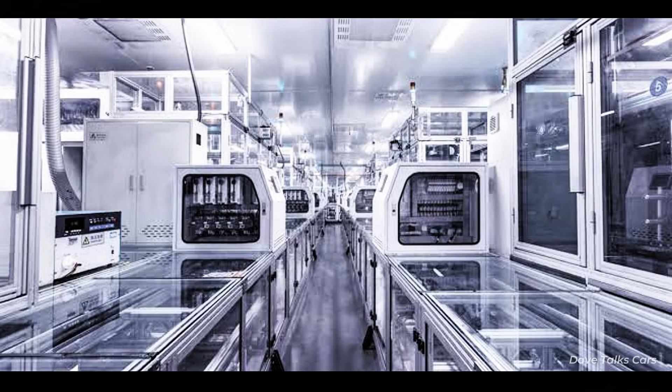There is a battery sitting in a laboratory in Shenzhen right now that may be the most important object on Earth, not because of what it is, but because of what it means for your car, your country's economy, and a technology race that has quietly become the defining industrial competition of our time.

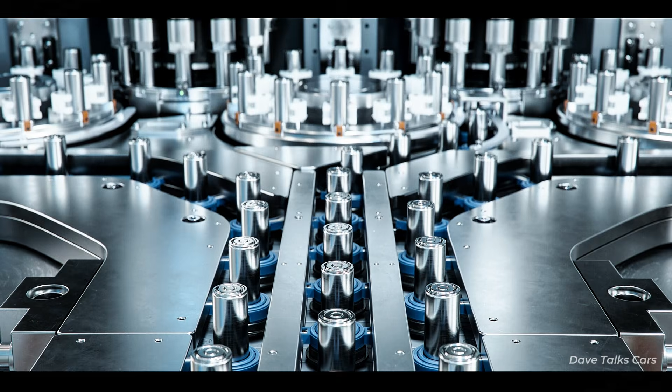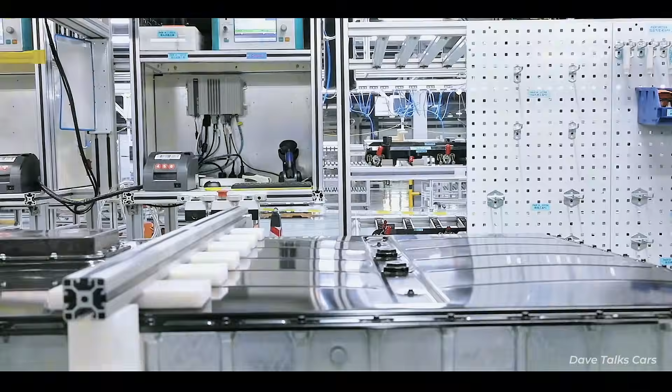You've probably heard that solid-state batteries are coming. You've probably heard that for years. And for years, they've remained just over the horizon, always promising, always delayed, always 5 years away from changing everything. But something shifted, and the shift didn't happen the way most people expected. It didn't happen in a Silicon Valley lab. It didn't come from a billion-dollar startup that promised to reinvent energy storage.

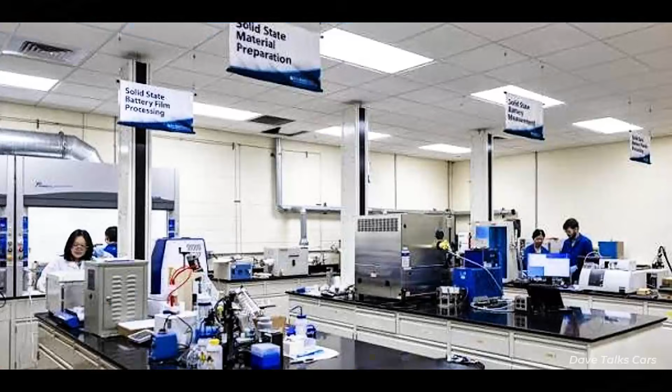It happened inside a government program most people in the West have barely heard of. It happened because China decided to stop treating this as a science problem and start treating it as an industrial war. And if that strategy is working, and there is growing evidence it might be, then the consequences for every automaker, every battery company, and every country that thought it could catch up later may be more severe than anyone is ready to admit. But before we get to what China built, we need to understand exactly why the world needed something new to begin with.

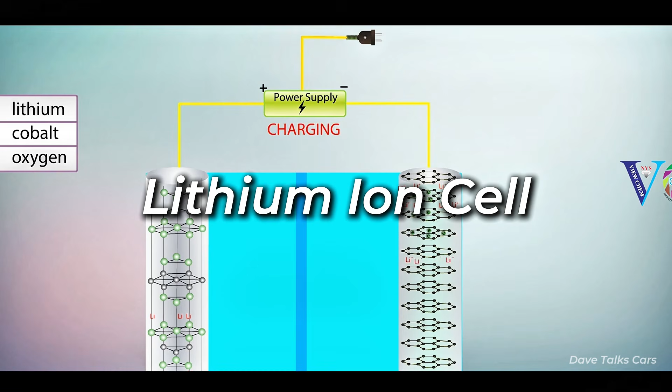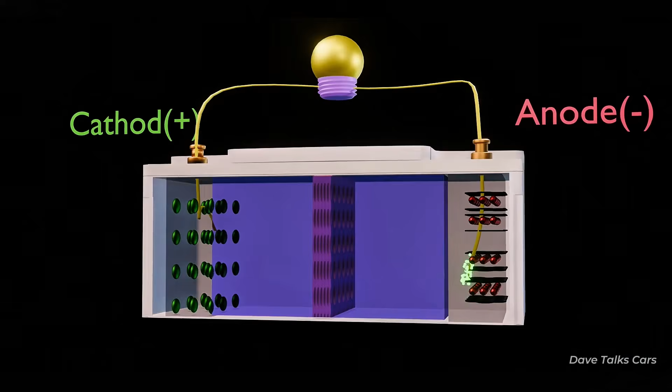For the last 3 decades, the story of electric vehicles has really been the story of one battery, the lithium-ion cell. It powered the first commercial EVs. It made Tesla possible. It made the $25,000 electric car conceivable. And it did all of that while getting cheaper and more capable every single year. At its peak, lithium-ion was one of the great manufacturing success stories of the modern era. But every technology eventually hits a wall, and lithium-ion began showing cracks a long time ago.

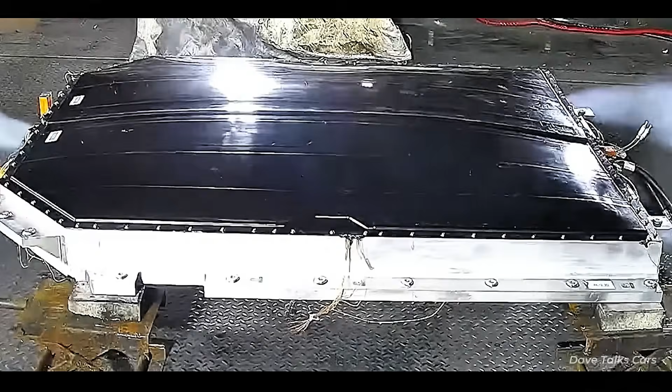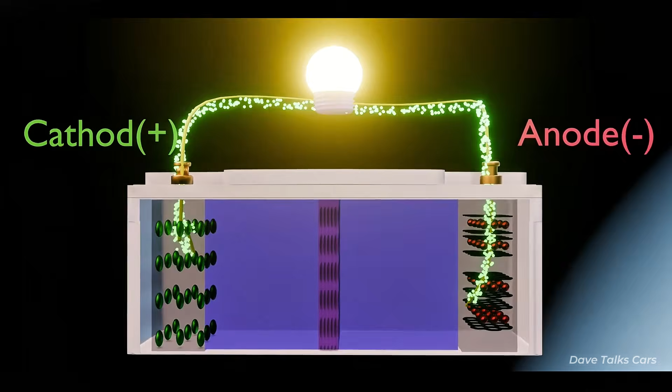The problem isn't that lithium-ion batteries are bad. They're remarkable. The problem is the gap between what they can do and what we actually need. They still require complex cooling systems to prevent overheating. They still lose meaningful capacity after a few thousand charge cycles. And no matter how many improvements engineers squeeze out of the chemistry, there's a fundamental limit to how much energy you can safely pack into a cell built around a liquid electrolyte.

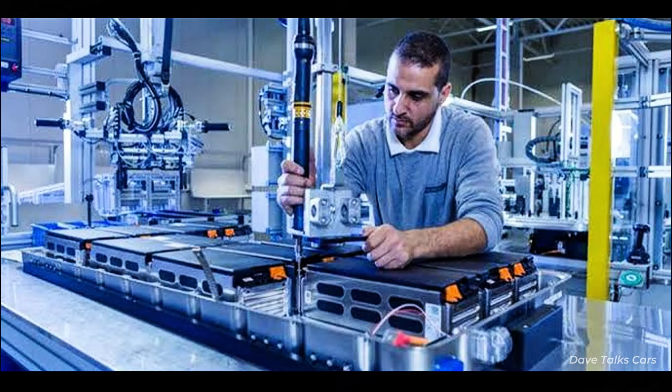That liquid, the medium through which charged particles travel between electrodes, is flammable. It degrades over time. It places an upper ceiling on how much power can be stored in a given amount of space. And for years, that ceiling has been getting harder and harder to raise. Engineers began to suspect that the era of meaningful lithium-ion improvements might be drawing to a close. The gains were getting smaller, the costs were getting higher, and the performance gap between what customers wanted and what the chemistry could deliver kept stubbornly refusing to close, which led the entire industry toward the same conclusion.

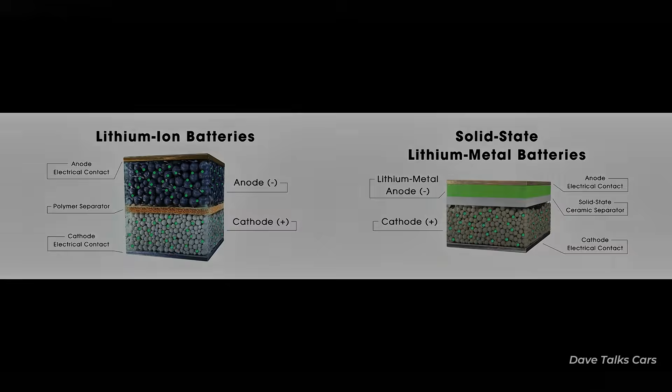The next battery couldn't just be a better version of what already existed. It had to be built on completely different foundations. That's where solid-state batteries entered the story. And if you don't know exactly what makes them different, the explanation is simpler than you might expect, and the implications are far larger than most people realize.

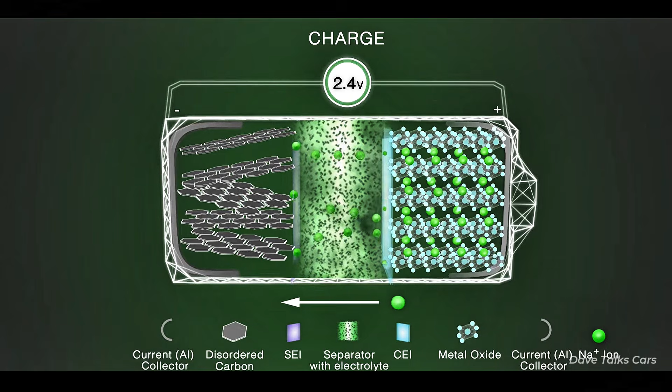Inside every battery, charged particles called lithium ions move back and forth between 2 electrodes. That movement generates electricity. The medium those particles travel through is called the electrolyte. In every lithium-ion battery on the market today, in your phone, your laptop, your electric vehicle, that electrolyte is a liquid. Think of it as a highway that ions travel across every time you accelerate. It works. It has worked for decades. But that highway is also flammable, unstable at extreme temperatures, and physically limiting in terms of how much energy can move through it safely.

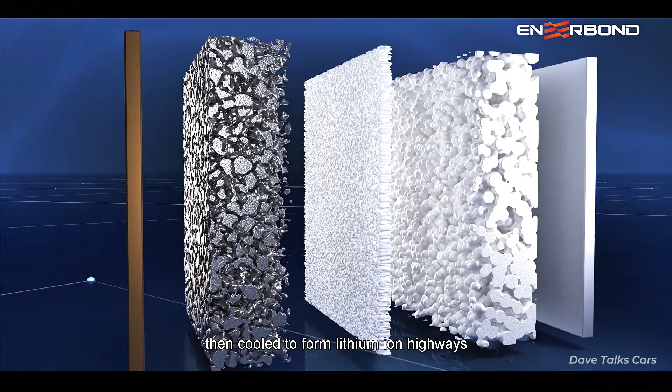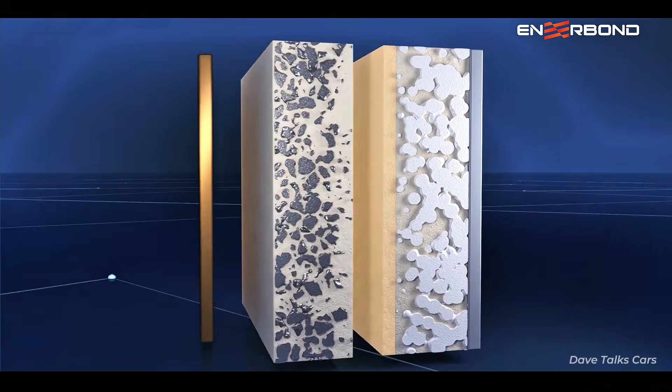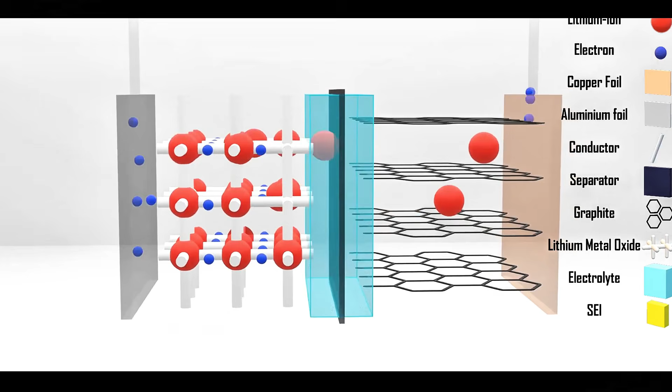A solid-state battery does something that sounds almost too simple. It replaces the liquid with a solid material. That single change rewrites almost every other constraint in the system. A solid electrolyte doesn't catch fire. It opens the door to new electrode materials, particularly lithium metal anodes, which battery scientists have dreamed about for decades because of how dramatically they can increase energy storage. It eliminates the need for heavy cooling systems.

And it removes one of the primary mechanisms through which batteries degrade over time. The result, in theory, is a battery that stores roughly twice as much energy in the same physical space, charges dramatically faster, lasts longer, and is far less likely to catch fire. If all of that sounds almost too good to be true, that's because there has always been a catch.

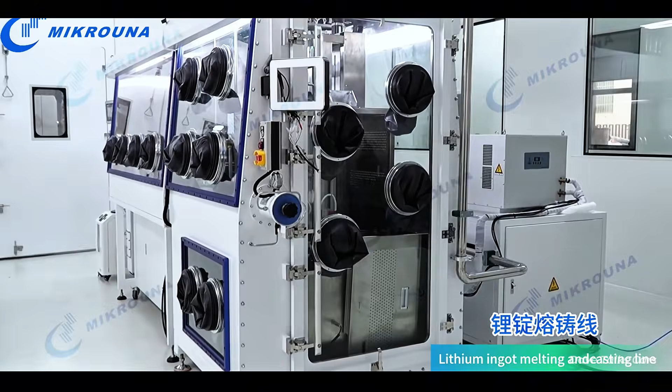The science of solid-state batteries has been understood for years. The challenge was never the concept, it was making them real. Replacing a liquid electrolyte with a solid one turned out to be deceptively difficult, not in the lab, where controlled conditions made early prototypes possible, but in the factory, where you need to produce millions of identical cells day after day at a cost that makes commercial sense.

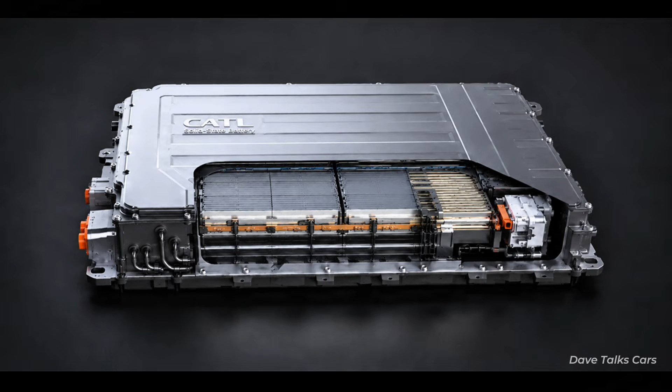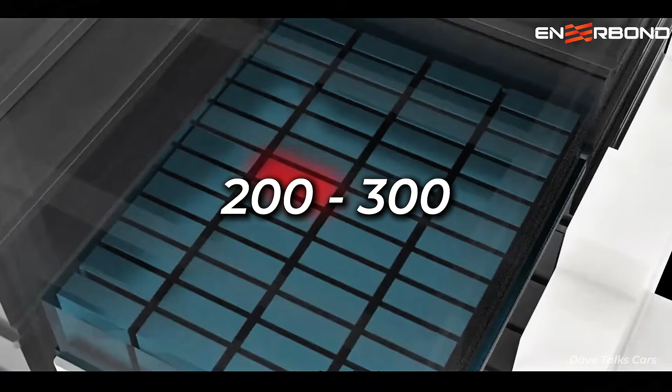And of all the different approaches researchers tried, the one that showed the most promise and the most manufacturing difficulty was a specific material class called sulfide electrolytes. Sulfide-based solid-state batteries offer the highest energy density ceiling of any approach being pursued today. Some research targets reach 450 to 900 watt-hours per kilogram. Current lithium-ion chemistry tops out around 200 to 300. That's not an incremental improvement, that's a generational leap.

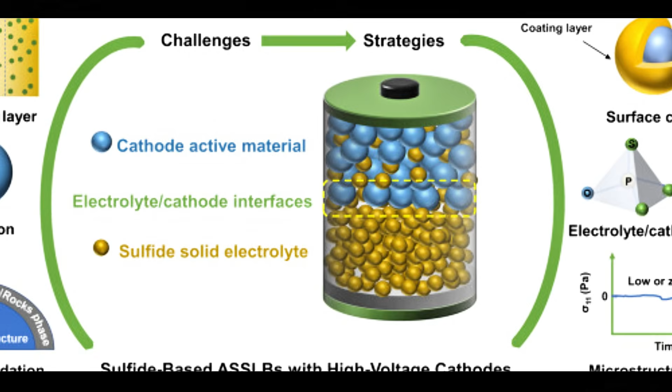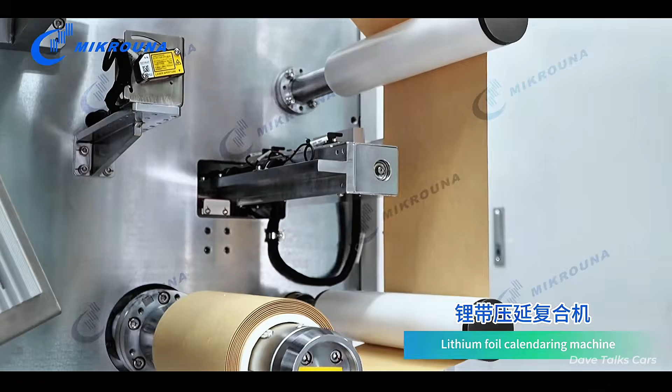But sulfide electrolytes came with a uniquely brutal problem. They were catastrophically sensitive to moisture. During manufacturing, even microscopic traces of humidity in the air could contaminate the electrolyte material, degrade its performance, or ruin an entire production batch. This wasn't a minor inconvenience.

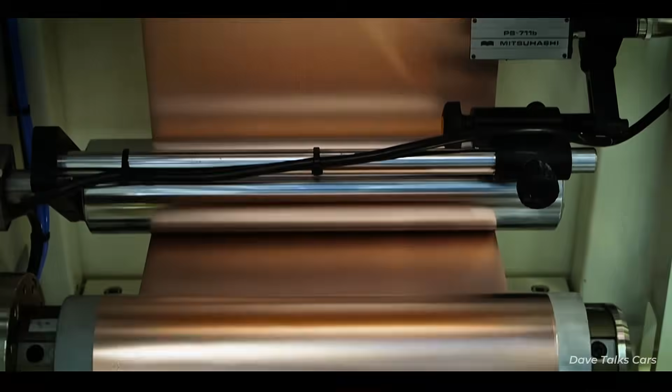It meant that anyone serious about manufacturing sulfide-based solid-state batteries at scale would have to reinvent how battery factories worked from the ground up. They would have to build ultra-dry production environments where humidity was reduced to almost nothing. They would have to design robotic assembly systems that minimized human contact with the materials. They would have to develop automated inspection systems capable of detecting defects invisible to the human eye.

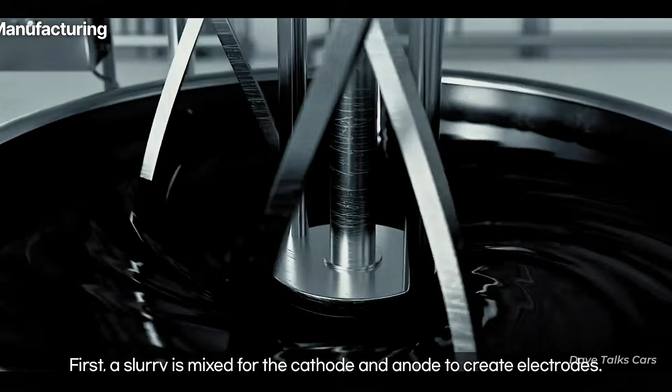Most companies that encountered that manufacturing challenge did what companies tend to do. They kept the research going in the lab and promised that the factory problems would be solved when the time was right. China made a different decision. And that decision may prove to be the most consequential strategic choice in the history of the automotive industry.

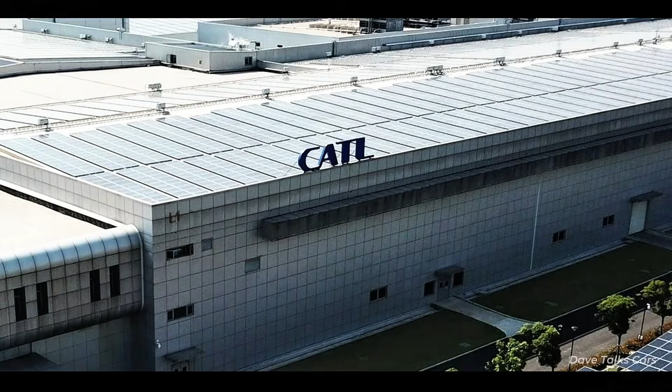In January 2024, Beijing did something that had no real precedent. It gathered the fiercest competitors in the Chinese battery industry into the same room and told them to work together. The resulting organization was called the China All-Solid-State Battery Collaborative Innovation Platform, CASIP for short. What made it extraordinary wasn't just who was in the room, it was what it represented.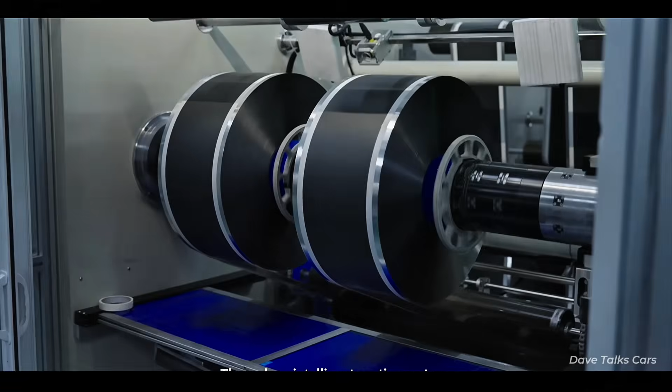CATL and BYD, two companies that had spent years competing for every single gigawatt hour of market share, suddenly found themselves in the same national program, sharing pre-competitive research, coordinating on manufacturing challenges, and operating under a unified timeline. Six of the top 10 automotive battery manufacturers in the world were part of the alliance. The Ministry of Industry and Information Technology was involved. The Ministry of Science and Technology was involved. State-owned investment funds were committing capital.

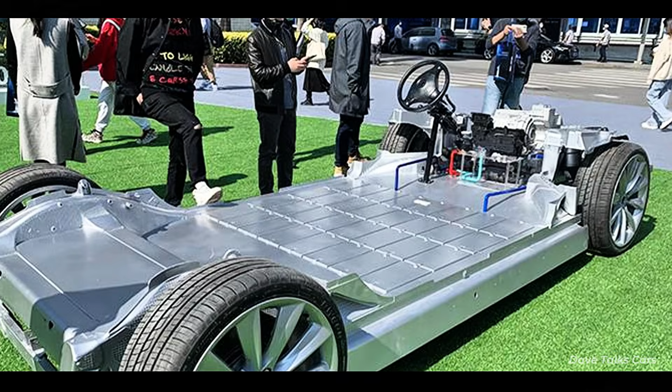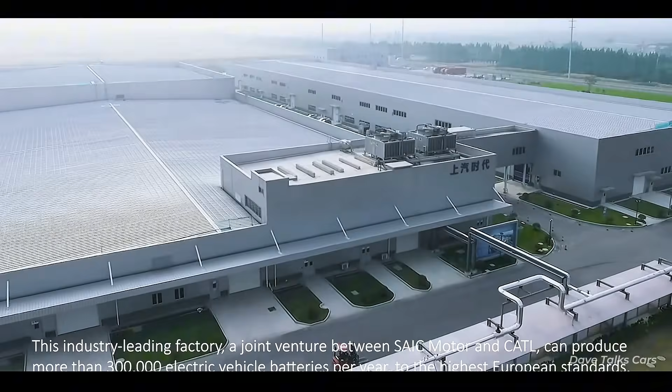And within months, the Chinese government followed with an additional investment of over 6 billion yuan, roughly $830 million, channeled directly into accelerating solid-state battery development among the country's leading manufacturers. One professor at Tsinghua University, speaking at the ceremony marking CASIP's formation, said something that captured the underlying anxiety driving the whole program. He warned that the industry needed to be prepared for the risk that solid-state batteries could overturn China's existing advantage in automotive batteries.

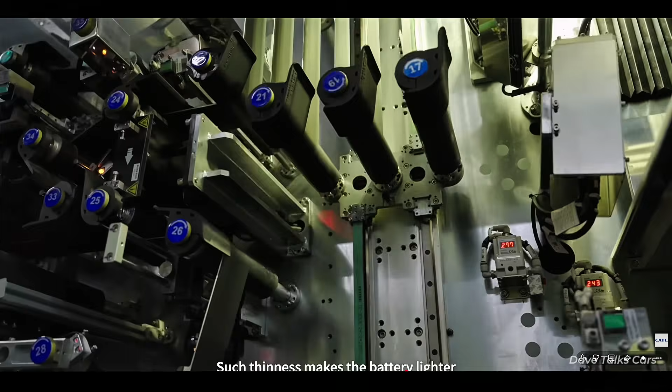That warning was striking not because it came from a pessimist, but because it came from one of China's most respected battery researchers, speaking to the country's battery elite. Even China's strongest players understood that this technology could reset the board entirely, and so China moved to make sure it wouldn't be caught on the wrong side of that reset.

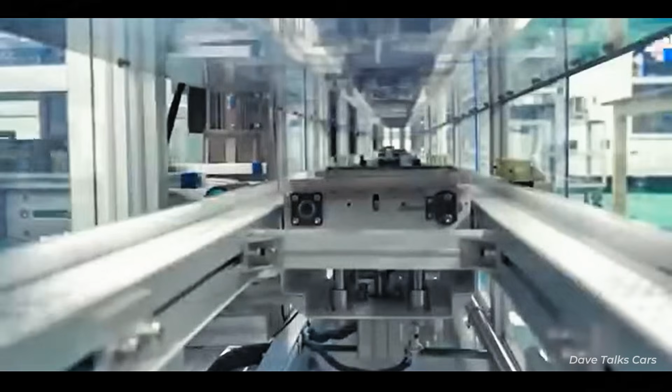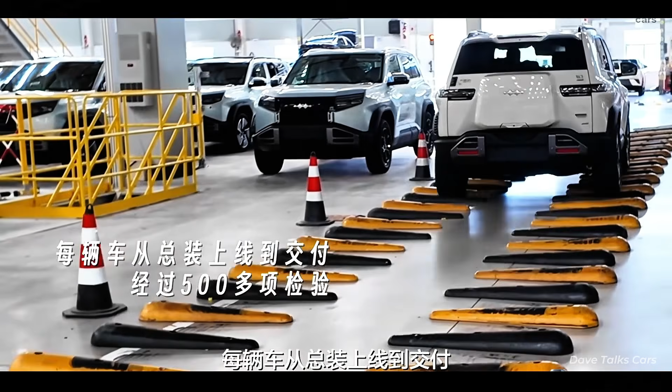The structure of what followed was methodical in a way that competitors found difficult to match. Universities focused on electrolyte formulations. Chemical companies worked on producing pure sulfide compounds. Equipment manufacturers developed the specialized machinery needed to operate inside ultra-dry production environments. Battery companies optimized cell architecture. Automakers began designing vehicle platforms capable of accepting the new technology once it was ready.

It was less like one company developing one product and more like an entire industrial nation aiming at a single target. But understanding a problem at the national level doesn't automatically make the engineering easier.

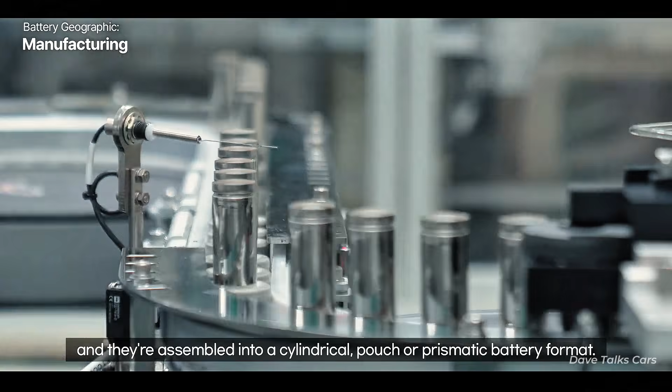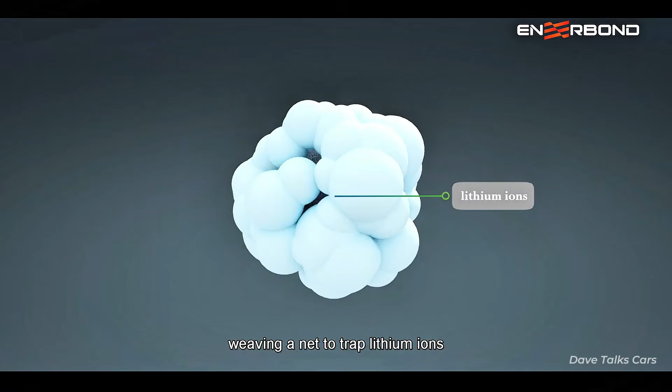And the engineering problems here were genuinely hard. One of the most stubborn challenges was the interface between the solid electrolyte and the battery's electrodes. Unlike a liquid, a solid material doesn't naturally flow across every microscopic surface inside the battery. Even tiny gaps create resistance. Resistance reduces efficiency, generates heat, and shortens battery life.

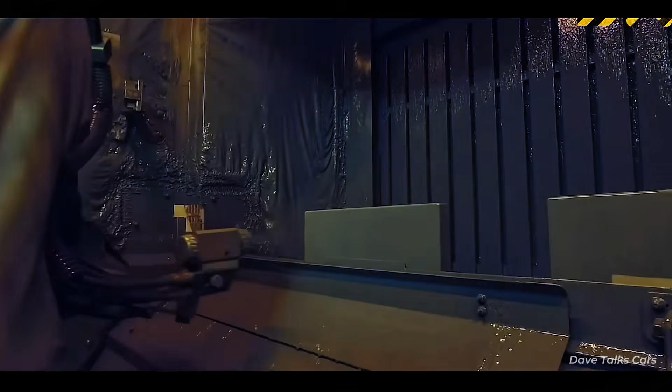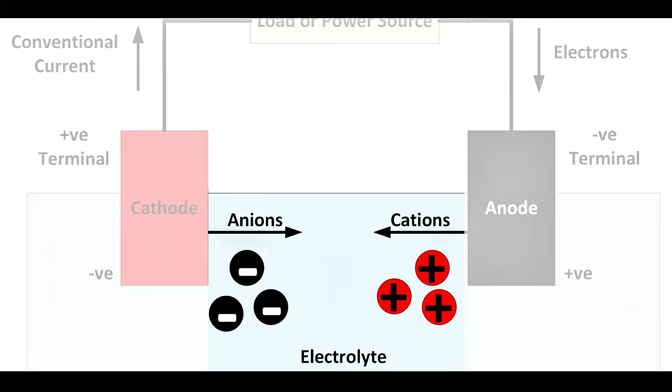Chinese research teams spent years developing new coating methods and higher pressure manufacturing techniques designed to improve contact between every layer of the cell. They experimented with more stable sulfide formulations that would maintain reliable performance across thousands of charge cycles. In battery manufacturing, a 1% improvement in production yield can save millions of dollars. A slightly more stable electrolyte can transform a laboratory curiosity into a commercially viable product. These aren't dramatic breakthroughs. They're the grinding, incremental, unglamorous work of turning physics into factories.

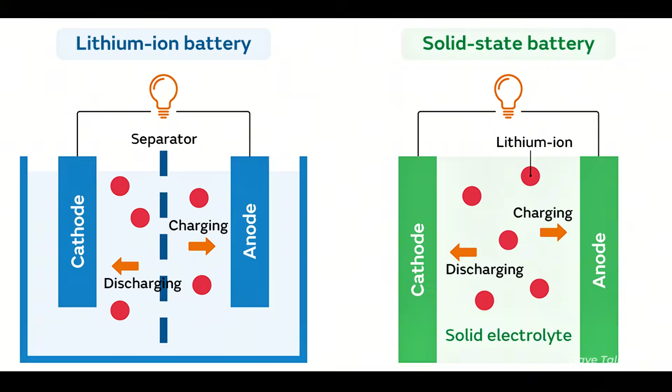By late 2024, CATL had entered trial production of 20 ampere-hour solid-state samples, a meaningful step from lab prototype toward pilot-scale manufacturing, targeting an energy density of 500 watt-hours per kilogram. Separately, researchers at the Chinese Academy of Sciences unveiled a prototype with an energy density of 451.5 watt-hours per kilogram and a claimed charging speed that raised serious eyebrows globally.

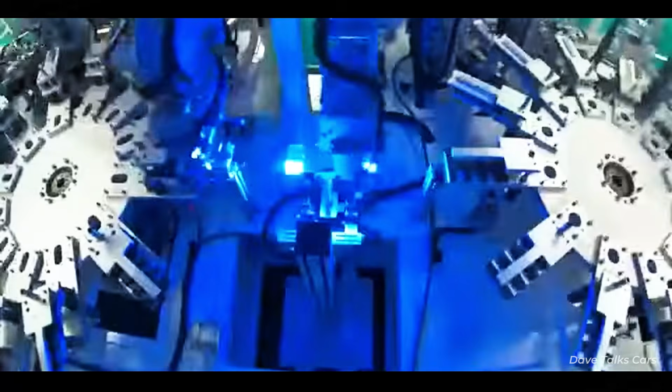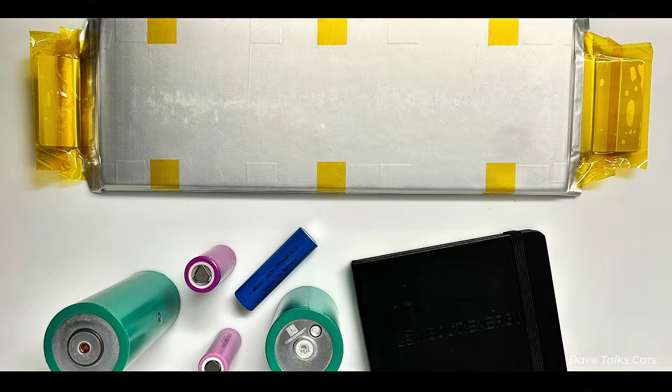By 2025, companies with solid-state battery teams exceeding 1,000 employees included CATL, BYD, WeLion, Qingtao, and Sunwoda. Those aren't lab teams. Those are the early foundations of an industrial workforce. Both CATL and BYD set 2027 as the target for small batch production. BYD's planned solid-state cells would target 400 watt-hours per kilogram and be used in its ultra-premium Yangwang brand. CATL announced a pilot production program targeting 500 watt-hours per kilogram.

Gotion High-Tech completed design work for a 2 gigawatt-hour all-solid-state production line, with a smaller pilot line already operating and vehicle testing underway. And China became the first country in the world to establish a formal technical standard, precisely defining what qualifies as a true all-solid-state battery, a regulatory move that positions Chinese industry to shape global definitions and international regulations before anyone else does.

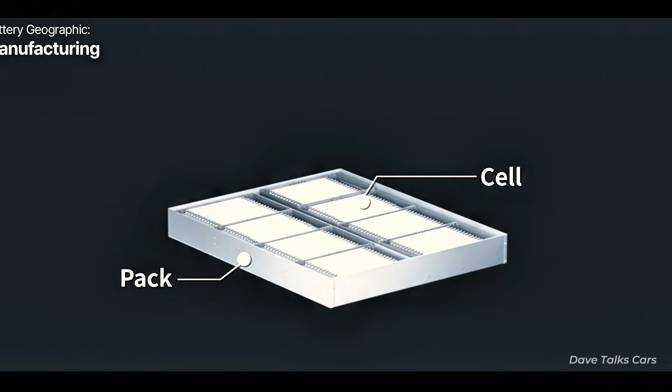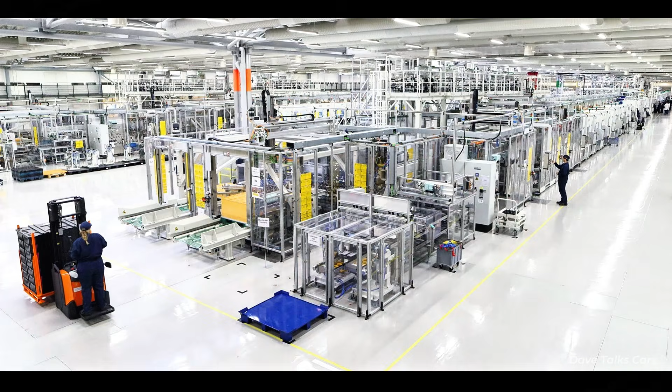But here's what you need to understand, and this is the part that changes everything about how you interpret all of those announcements. The race is not about who builds the best battery in a laboratory. It never was. The race is about who learns how to build millions of identical batteries in a factory, consistently, cheaply, and without fail. Because the history of technology is littered with companies that had the best science and still lost everything to the competitor who cracked manufacturing first.

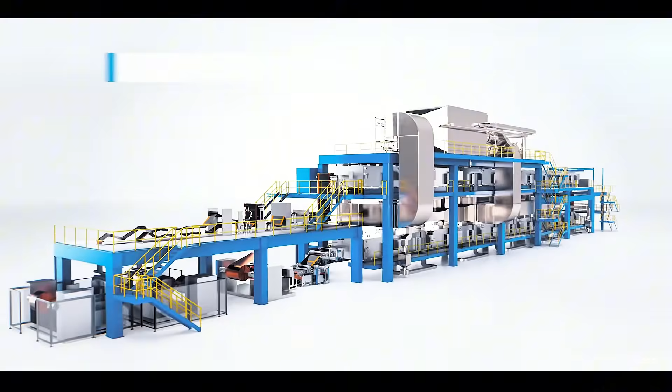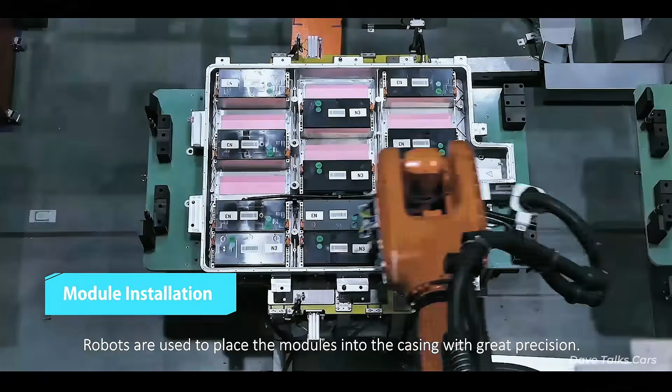Think about what happened with lithium-ion batteries themselves. Chinese companies didn't invent lithium-ion chemistry. That work happened in American, British, and Japanese research institutions. But Chinese manufacturers learned how to build lithium-ion batteries faster, cheaper, and at greater scale than anyone else on Earth. They built the supply chains. They built the factories. They trained the workforce. And over 2 decades, they turned a Western scientific achievement into a Chinese industrial monopoly. Today, the US sources roughly 70% of its battery imports from China, not because American companies couldn't do the science, but because they didn't build the factories.

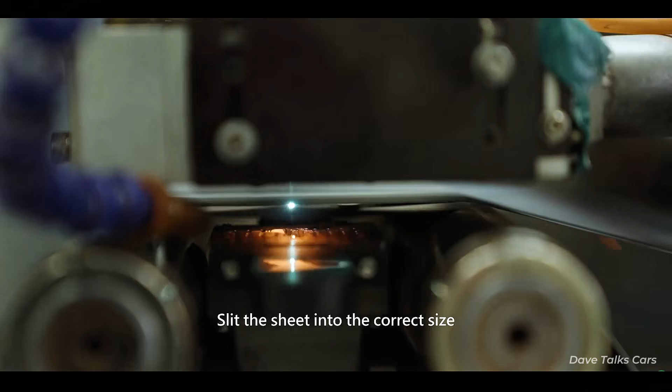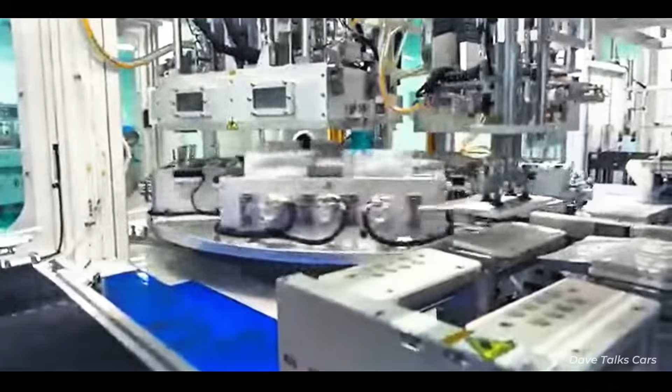If the same pattern plays out with solid-state batteries, and there is genuine reason to worry that it might, the consequences could be more severe. Because this time, the technology in question isn't just a component, it's the single most important part of the most important new vehicle category of the 21st century. And unlike other industries where technological advantages fade, manufacturing experience in advanced batteries compounds. Every year of production experience reduces costs, improves yield, expands the supply chain, and deepens the engineering knowledge embedded in the factory floor. Those advantages become harder to erase with every passing year.

Now, does all of this mean China has already won? Not remotely. That's the part of this story that gets lost in the headlines. The real situation is more complicated and, in some ways, more interesting.

CATL's own CEO, Robin Zeng, acknowledged in a candid interview that mass commercialization of solid-state batteries by 2030 is unlikely and that initial applications will probably be limited to vehicles priced above 250,000 yuan. Even China's most sophisticated battery manufacturer is not pretending the finish line is close.

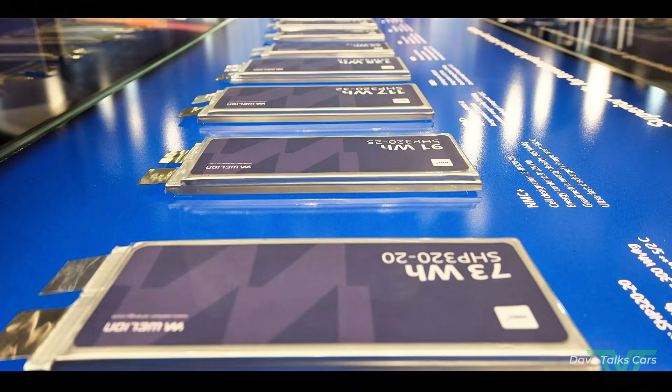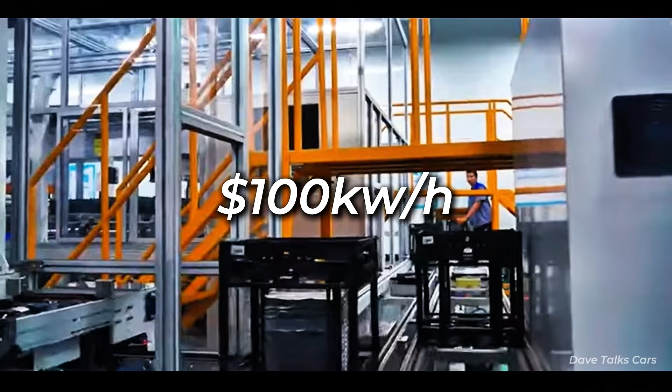Current solid-state prototypes cost between $220 and $300 per kilowatt-hour. Getting to mass market viability requires reaching below $100 per kilowatt-hour. Nobody, not in China, not anywhere, knows exactly how to bridge that gap yet.

The remaining technical hurdles are not trivial. Sulfide electrolyte layers have been described by engineers as ceramic-like, dense, brittle, and unforgiving. Maintaining the constant high-pressure compression needed to keep solid layers in contact inside a battery cell creates design constraints that can eat into the weight advantage that high-energy density is supposed to provide.

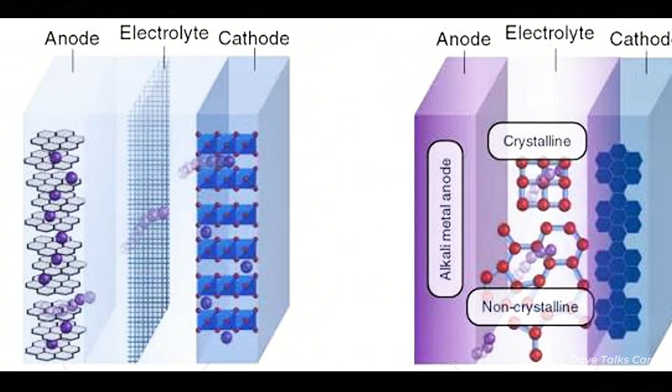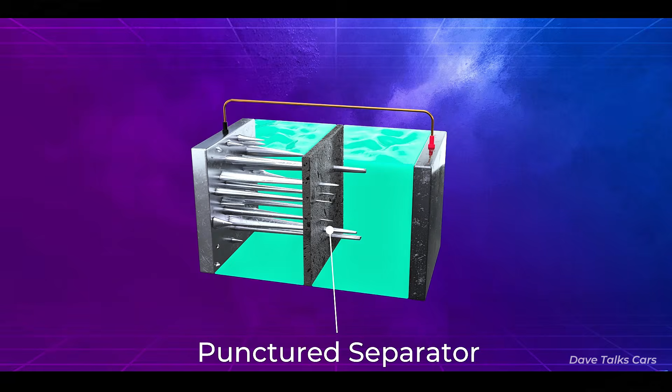And lithium dendrites, microscopic metallic filaments that can form inside the battery during charging and cause catastrophic failures, remain a problem that even the most advanced research teams are still working to solve. And then there are the competitors.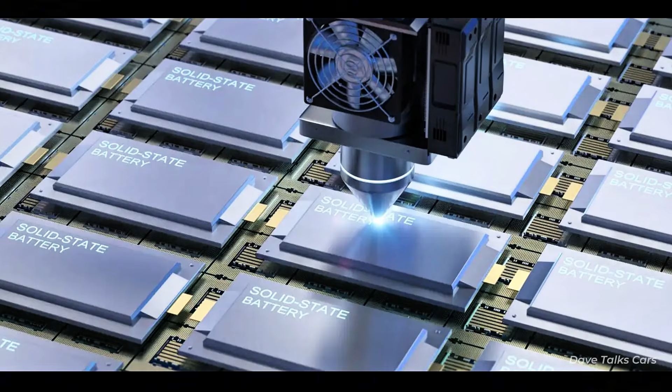Toyota holds one of the largest solid-state battery patent portfolios on Earth and is targeting vehicle launches between 2027 and 2028. Samsung SDI aims to begin mass production of next-generation batteries for premium vehicles by 2027. Nissan has a 2028 target. Volkswagen-backed QuantumScape and Factorial Energy, working with Mercedes-Benz and Stellantis, are developing their own solid-state approaches with serious industrial backing.

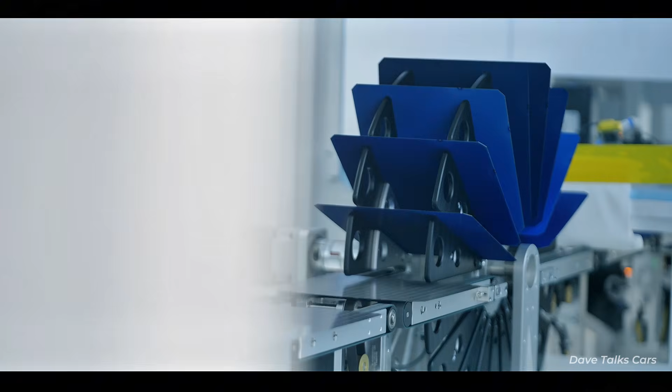The United States invested $40.9 billion in battery and critical mineral manufacturing between mid-2023 and mid-2024. New gigafactories are rising. Government policy frameworks are being rewritten. The West has not surrendered. But here's the uncomfortable truth that sits beneath all of those announcements. Investment and intention are not the same as experience.

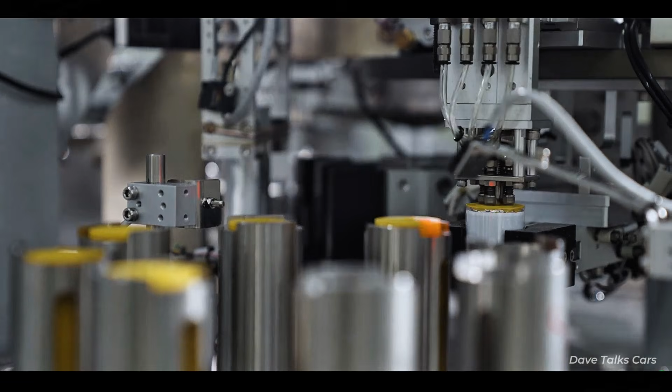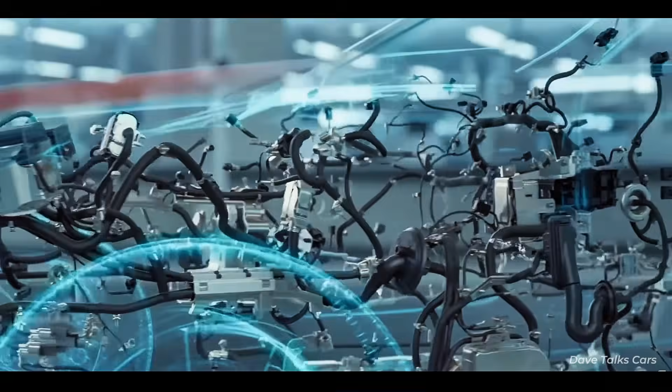China's battery industry has something that cannot be bought quickly or replicated by policy alone. It has a decade and a half of continuous, compounding manufacturing knowledge embedded in the most integrated battery production ecosystem ever assembled. That knowledge doesn't just live in company reports or patent filings. It lives in the thousands of process decisions made by engineers on factory floors, in the supplier relationships built over years, in the equipment calibrations that took countless failed batches to get right.

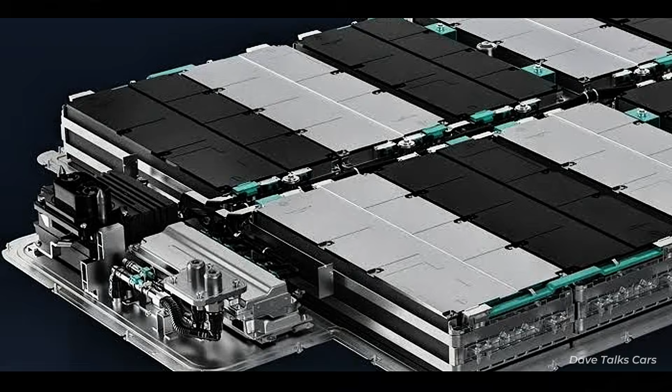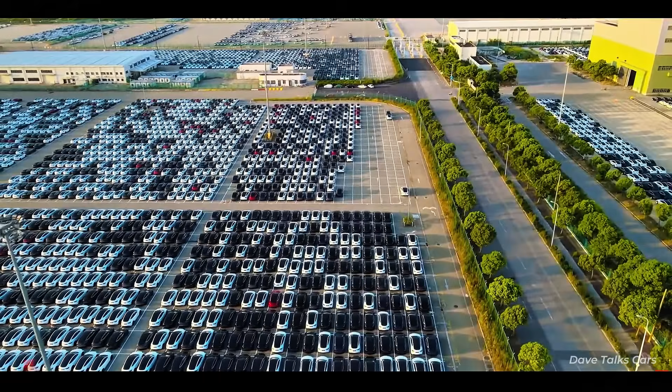And so the world now finds itself in a genuinely uncertain moment. The most transformative battery technology since the invention of lithium-ion is approaching commercialization. The competition to get there first involves not just companies but governments. Not just engineers, but economic superpowers. Not just automotive industries, but national strategies for who controls the future of energy, transportation, and perhaps much more.

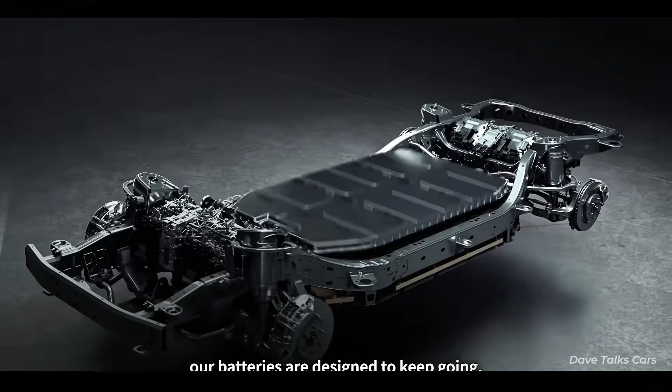Here is what's at stake. Solid-state batteries could unlock electric vehicles with ranges approaching 1,000 kilometers on a single charge. They could make 10-minute charging genuinely feasible. They could be dramatically safer than anything on the road today. They could power the next generation of electric aircraft, advanced robotics, and grid-scale energy storage.

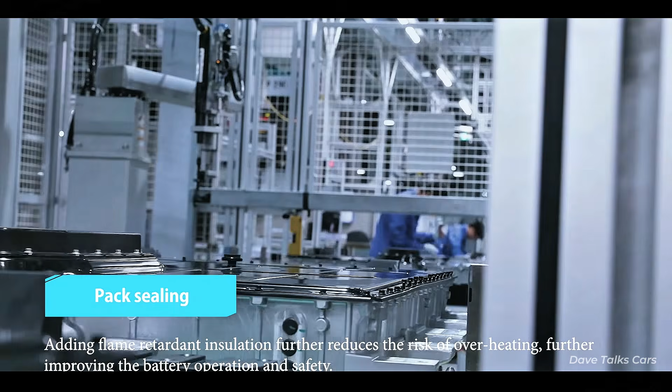Whoever builds those batteries at scale doesn't just gain market share in automotive, they gain leverage across multiple industries simultaneously. The country that wins this race doesn't just build better cars, it builds the infrastructure of the next economy. It controls the supply chains, it trains the engineers. It sets the standards. It earns the decades of manufacturing advantage that make it increasingly difficult for anyone else to compete on even terms.

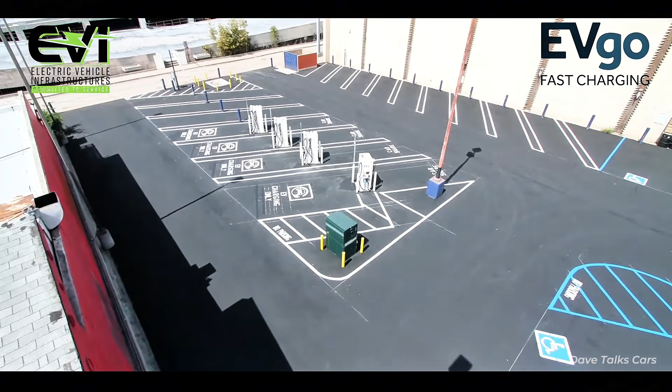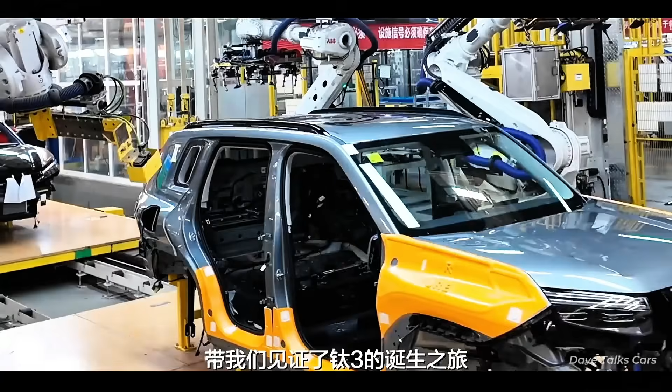China is aware of this. That's why the country launched CASIP not as a corporate initiative, but as a national project, the way you'd mobilize for something you believe is genuinely civilization scale in its importance. The United States is aware of this. That's why battery manufacturing has become a strategic priority in Washington, in a way it never was a decade ago.

Japan is aware of this. That's why Toyota has spent years building what it calls the world's largest solid-state patent portfolio, even as it's been late to the broader EV transition.

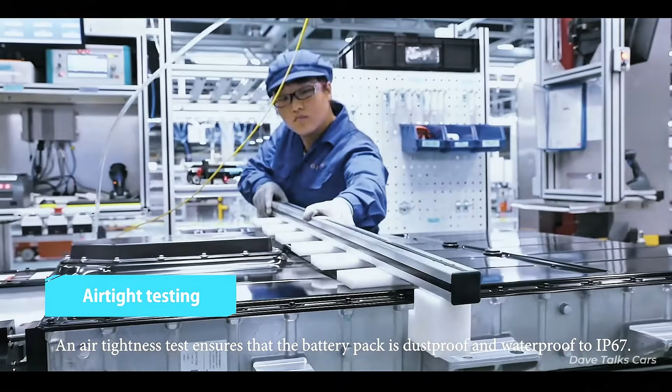The question that nobody can yet answer, and the question that will shape the global automotive industry for the next 50 years, is whether China's head start in manufacturing culture, supply chain integration, and national coordination can be overcome by the scientific talent, institutional depth, and capital markets of the rest of the world. The answer to that question won't be written in a laboratory, it will be written in factories, and the factories are only just being built. What happens next matters beyond any single product, any single company, or any single country.